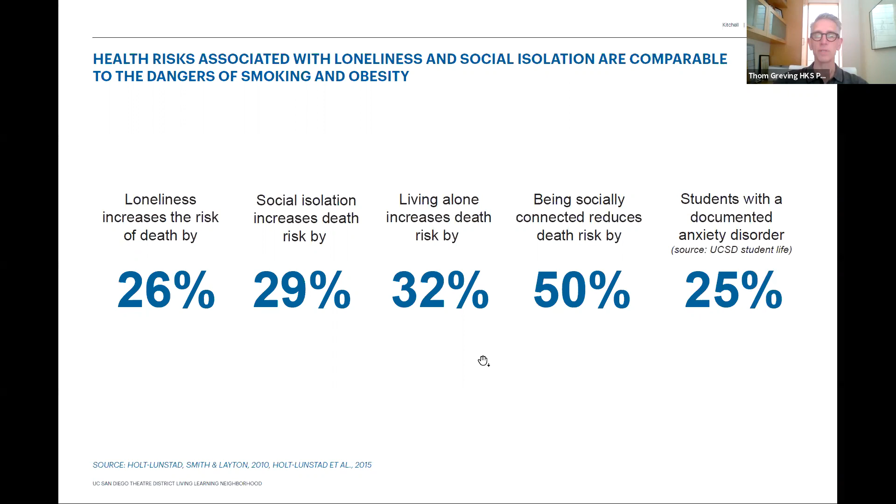So what we're seeing specifically at UC San Diego is that 25% of students arriving on campus in their freshman year have a diagnosed anxiety or mental health issue. With numbers like these, you really get the sense that it's mission critical for a project like this to succeed for the well-being of the students.

That's why we look at these institutions, because we're designing a residential neighborhood basically for 2,000 beds. Who are the people we're designing for? The university states these are really critical statistics and needs that we must address when creating neighborhoods that will be successful.

In addition to the anxiety and health disorders mentioned, many students also work. Some of them are older, going to school later in life. Some of them have children.

Some of them obviously have income issues. At UC San Diego, again these are all UC San Diego statistics, 60% of the students coming are of color, which is higher than the national average. And again, I mentioned the 25% with documented anxiety disorders. So these statistics become really important, especially when you put them into the broader notion of things that we wrestle with in society: housing insecurity, food insecurity, physical disabilities, developmental disabilities, veterans, students with children, and many underrepresented minority groups.

So we'll tell you just a little bit more about the neighborhood and then talk about the process that we're using to design it in a way that addresses some of these issues.

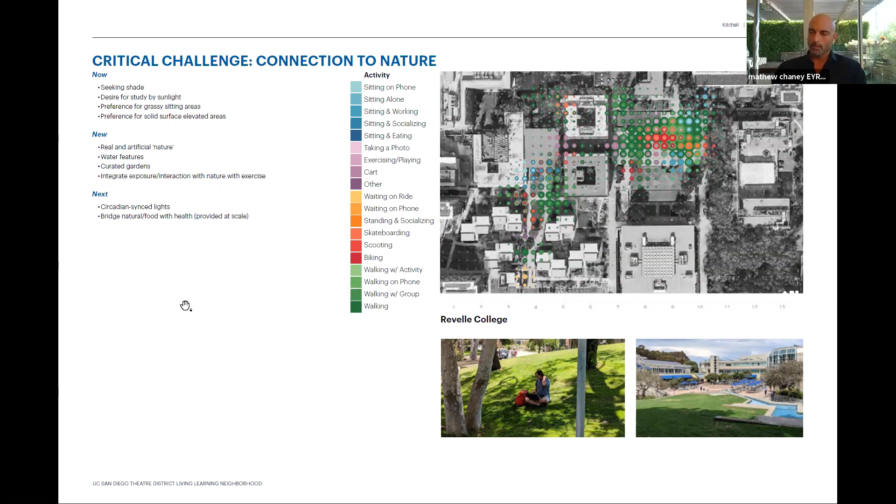We did a lot of behavior mapping for different reasons, looking at developing different types of outdoor and indoor locations, observing what was happening on campus, interviewing, and finding what was successful and what wasn't, especially as it tied to outcomes desired around connecting to nature. We did a lot of heat mapping relative to activities connecting to nature and exercising, from a health and wellness standpoint, visiting various locations on site with direct relevance to what we were doing. We'll bring up some of those items again as we talk through the design strategies.

During the design competition and continuing afterwards, we anchored the project conceptually in this notion of exponential ecology. The idea of ecology is the relationship of an organism to its environment. So for us, exponential ecology asks: what virtuous cycles can we create for the organisms, the people who will inhabit the project, that will continue to create positive outcomes throughout every aspect of their interaction with it? This became a real guiding principle - whenever we made a design decision, we made sure it reinforced other design decisions. Nothing was allowed to exist just in its own box.

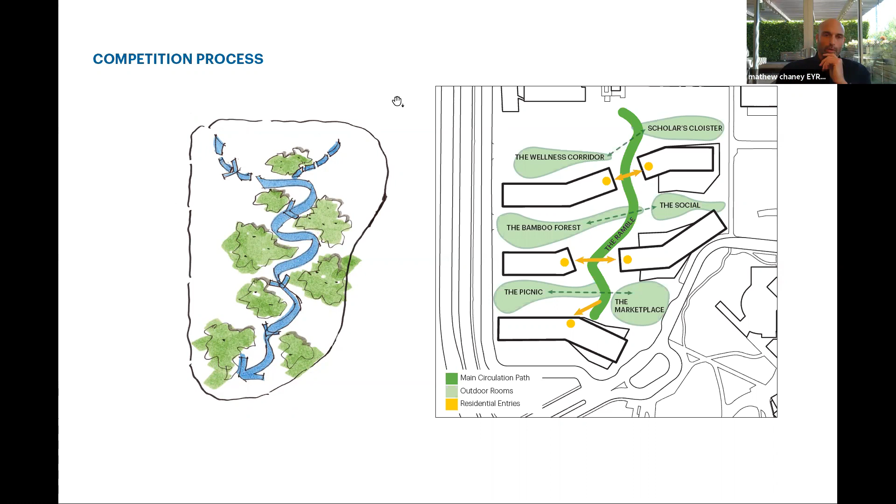As we began dealing with the site and planning how to accommodate these 2,000 beds of student housing along with other program pieces, with guiding principles of maximizing connection to nature, the first move we conceived together with our landscape architect was restoring the natural drainage ecology of the site. It's currently a giant asphalt parking lot serving the theater district and faculty and staff parking. But if we restored the normal drainage ecology, as we move stormwater across the site, how might that create an organizational idea to organize the buildings around?

You can see the diagram on the left showing the idea of the ramble, this natural storm drainage that would move through. We used that to carve the project in the north-south direction, allowing the building bars to be bifurcated by that dry creek bed type element. This also started to create a number of outdoor rooms with unique characters: the wellness corridor, the scholars cloister, the bamboo forest, the picnic, the marketplace - you'll see more about those as we go.

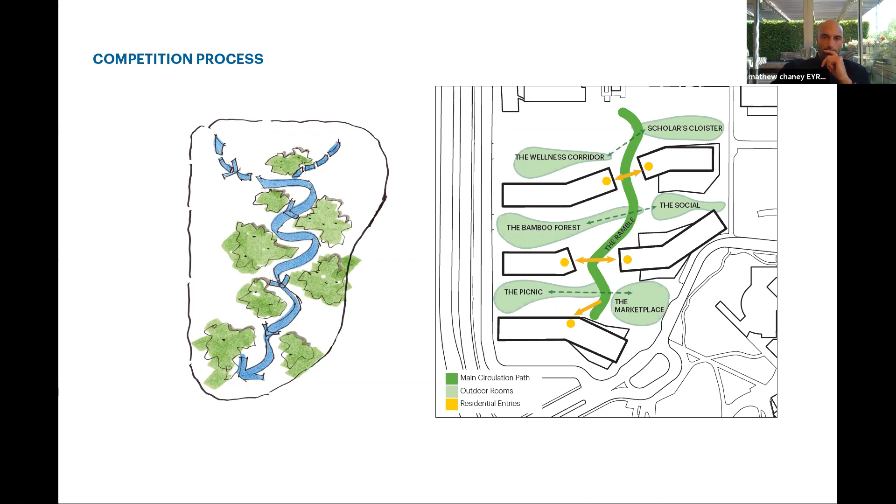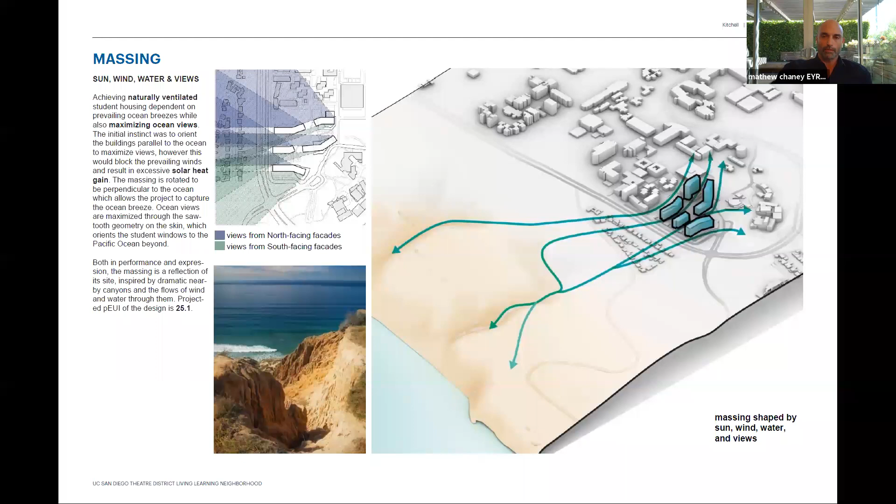Continuing this idea of allowing the environment to inform building geometry and organization, and knowing our sustainability and energy use intensity targets, we wanted to figure out how to make these buildings naturally ventilated and optimize the building geometry for that. Looking at the predominant westerly winds off the water, and the natural topography and canyons that funnel wind currents up to the site, we allowed the wind to carve the project in the east-west direction, turning the buildings and shifting orientations to capture that wind and also capture views. We did view studies and parametric tests to optimize the building massings for both natural ventilation and view opportunities from the student rooms.

So you see this more developed site plan with the building bars running east-west, putting the dominant solar orientations facing north and south. We'll talk a bit more about the facade design and the crenellations we created on the lower portions of the elevations to optimize wind flow and improve opportunities for natural ventilation. You start to see the ramble in the form of the green tree belt line running through the project, and the clear outdoor rooms with their different characters in between.

As much as this is a living and learning neighborhood, it's not just housing for the 2,000 beds, but it also is an academic cluster, which is the northeasternmost building, building 5. It also creates the Market Plaza, framed by buildings 3 and 4, which interacts intensely with the existing theater district and La Jolla Playhouse and other theater facilities down there, creating a new amenity anchor in the form of a market hall and other retail opportunities that serve as an attractor for not only students on campus, but for residents and visitors from all over San Diego and those coming to theater performances. So it really becomes this self-reinforcing living and learning neighborhood, hence the name.

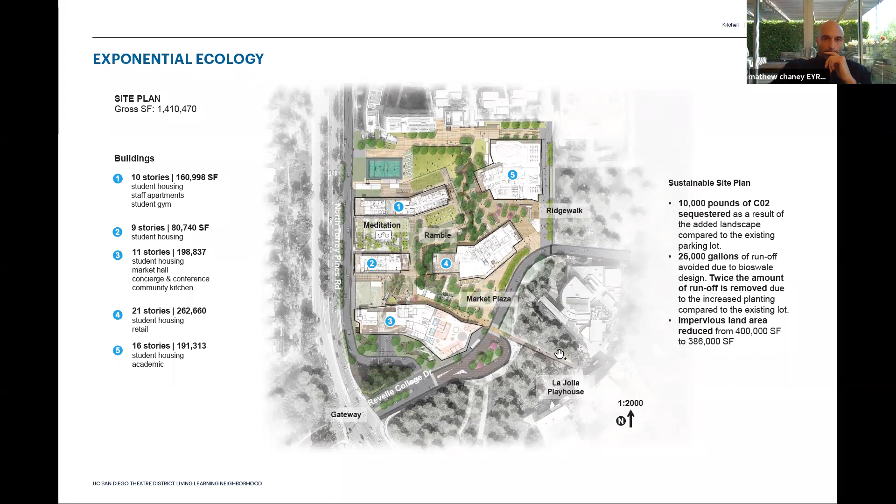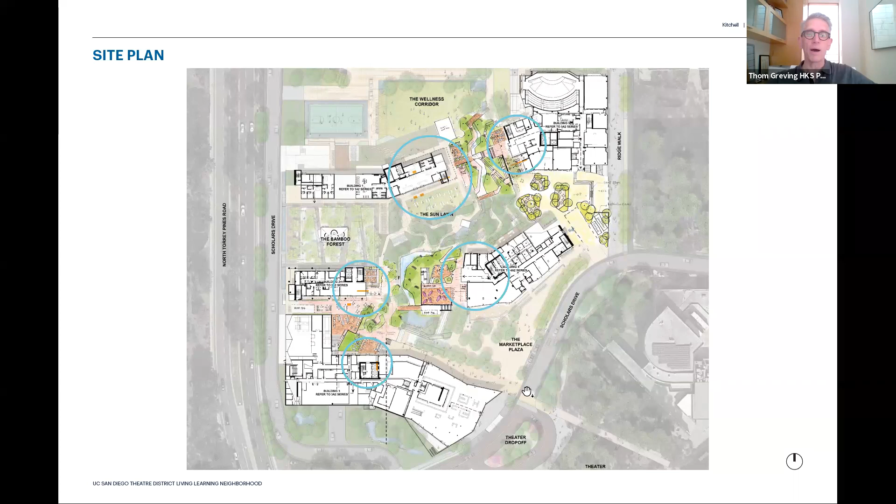If you remember the diagram of the ramble that goes through the center of the site, we decided to figure out how to continue to make that a place of community and gathering, creating individual identities for the entrances to the residences. In all cases, the residential entries enter out onto this ramble, which becomes the more private part of the site for the residential buildings, whereas the portions along Ridge Walk and the theater district become more community focused. So there's a nice opportunity to both interact and pull away as needed.

At the base of each residential building, as you can see in the diagram, the blue circles become the front doors or addresses to these residential buildings. At each location we've developed porches at the base of the buildings, caused by the overhang of the building above, that bring the scale of the building down, give each building its own individual identity, and provide opportunity for entrance into these buildings off of the ramble, which is the organizing community aspect of the site.

There's also obviously the connection to nature that occurs in every motion as people come and go from the building. Each porch ended up having its own theme—some have hammocks hanging in them, fire pits, other ways for social gatherings to occur, inviting people into that front porch, an in-between place between the full community areas of the building and the more private residential portions.

This was really fundamental to the idea of creating these nested senses of belonging. By giving each of these front porches a clear identity, it gives students living in that building an opportunity to socialize in a semi-private space that belongs to their building and clearly identifies them as part of it, while also allowing them to invite others passing by on the ramble, or friends, to come experience the unique qualities of their building. So there's an opportunity to share that way too.

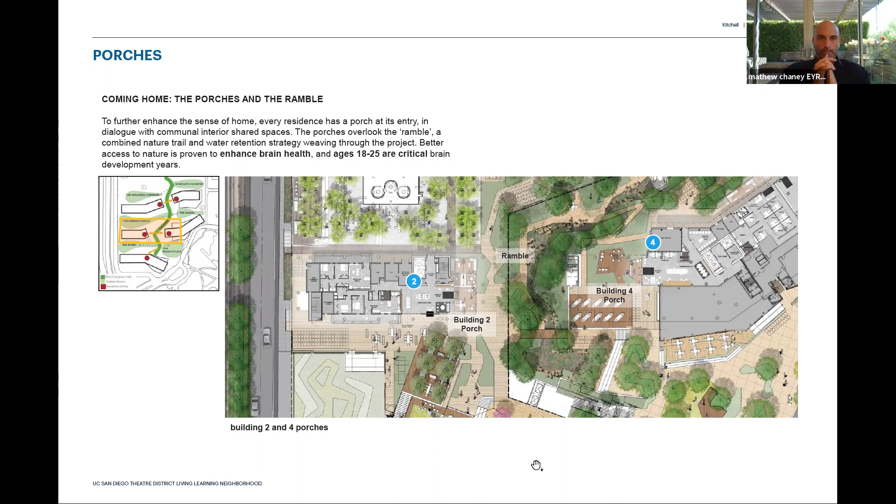So Matthew mentioned some of the outdoor rooms. In between each of these buildings, spaces of varying sizes—as the buildings move back and forth across the site—create different scales of outdoor spaces that give students different opportunities, to be either alone or in groups. The scales and character of these spaces differ because of the size of the buildings or the type of planting.

Some are more active and used for activities such as running or other outdoor activities. Some of them are actually used for more meditative uses.

I think this was one of the exciting aspects of the progressive design-build process: rather than having a fully locked-down program, it really allowed the design team to innovate, tailor the program, make suggestions to the university, and collaborate with them in its evolution to help reinforce these concepts around wellness. Once these ideas got floated—to create a meditation pavilion, a tea house, smaller more contemplative spaces that can either be experienced directly or are just part of the background that students circulate through—it gave us an opportunity to really push the conceptual aspects of the project to the highest possible level.

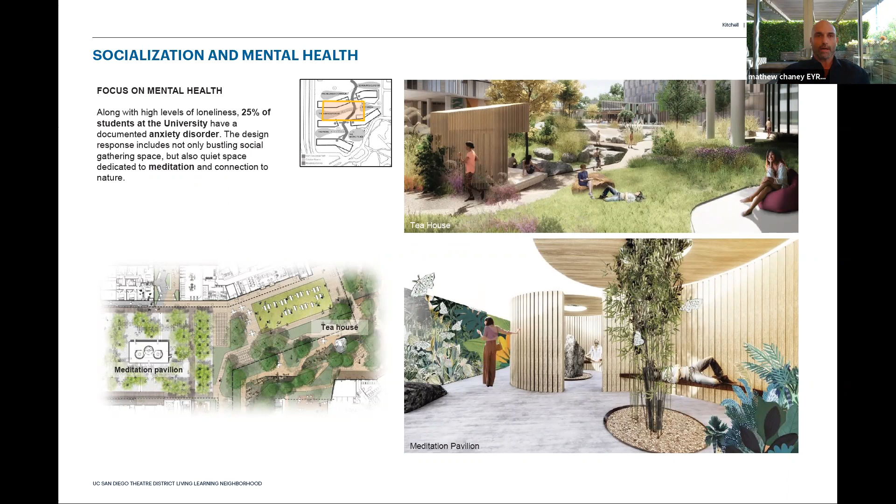So this is an image of the meditation pavilion, about 1,500 square feet, open air, unconditioned space. It's been designed to maximize the number of people who can use it simultaneously while maintaining the privacy necessary for effective meditation or contemplation, but also preserving security and making sure people have eyes on each other for safety.

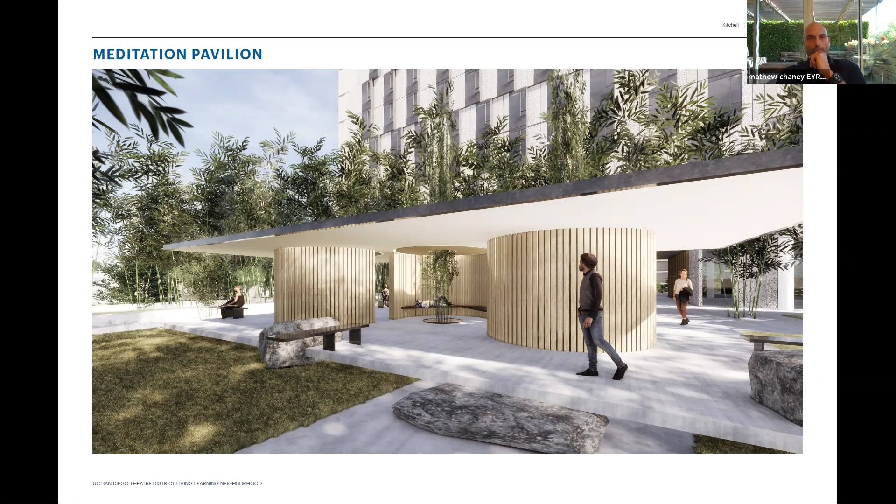All of this is landed within what we call the bamboo forest, which has a circular walking path that meanders through those bamboo elements. So even if one isn't sitting and meditating in a more conventional fashion, that contemplative strolling and walk experience is its own mindful process.

So this is an image looking down the ramble. As you can see, the portions along the walkways are the dry creek bed that accommodate the runoff from the site. Also illustrated here are three of the front porches that open onto this shared outdoor natural amenity.

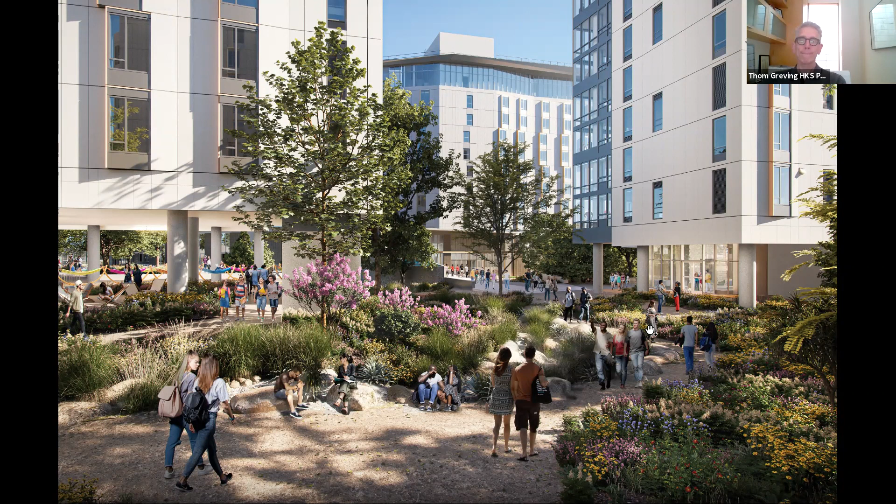Talking further about the ground plane, we were very focused on making sure that in creating connections to nature, we were creating connections that were actually comfortable, giving opportunity for different types of activities met by the human comfort needs for each activity. In more contemplative situations where people weren't moving, they needed to not be too cool or too warm. In other areas, they could be more open and in the sunlight.

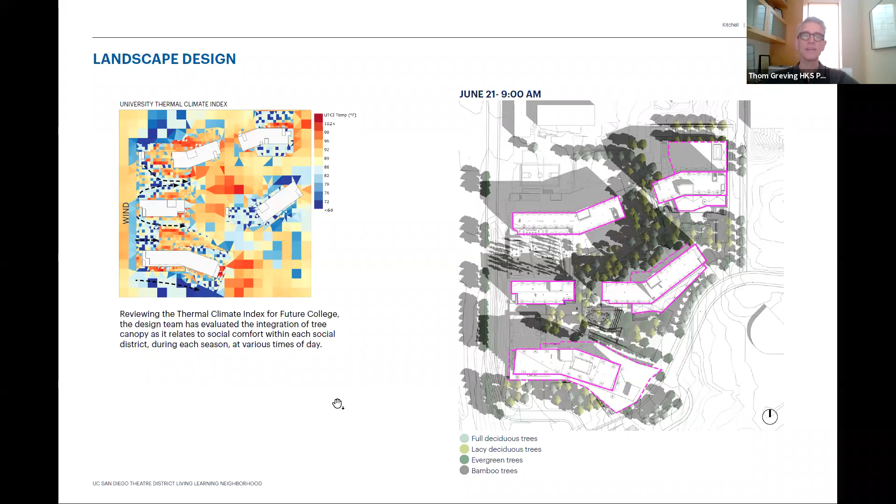So what we did is run several computational fluid dynamics studies on air movement through the site, the wind as it comes off the ocean, and then paired that with the location of plant materials on the site, studying the shade patterns of different types of materials and locations, so we could create the sorts of environments we wanted in each of these outdoor rooms.

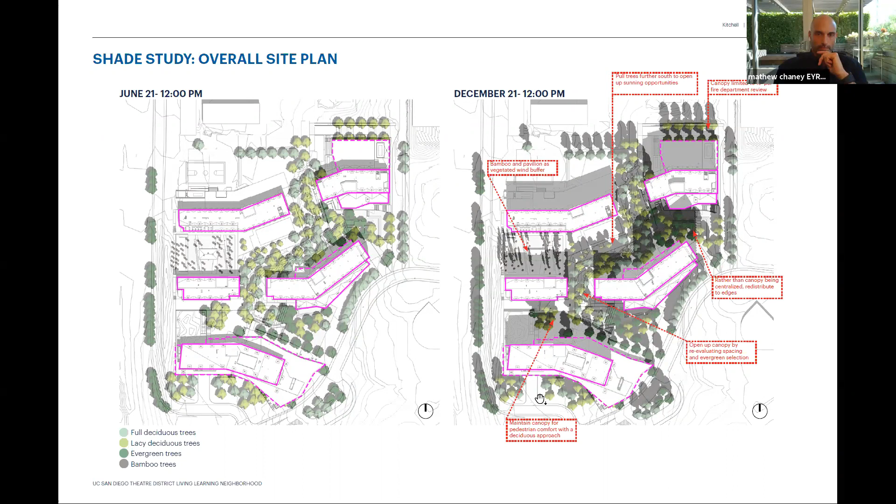These were studies that showed, these are just images from the studies we used as we looked through the project.

From an outcome standpoint, we had the opportunity after it was all done to look at what was accomplished in reducing the amount of runoff. We're happy to say that 100% of all the runoff on the site will now be handled through natural filtration processes and will not be put into the sewer system or in any way affect the runoff that goes to the ocean. That was a great outcome we all felt really good about.

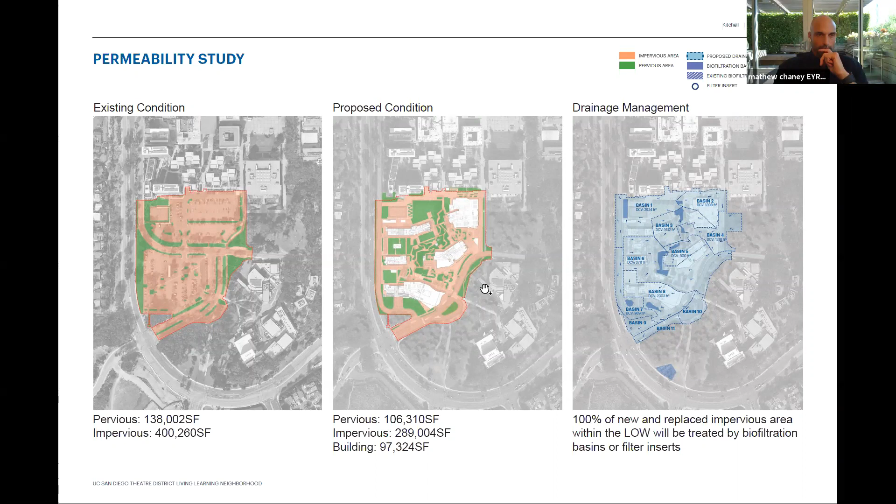So moving from the site up under the building forms and into the facade design, we'll talk a bit about how that developed.

The overall building massing, with North Torrey Pines on the western edge of the campus and our project site, and Revelle College Drive as it turns into the campus and leads to the existing theater district, it was really important to the university and the community that we reduce the building massing as much as we could on the western edge of the project site, relating to the residential neighborhoods on that side.

Some of the other moves we made were looking at the two different building skins that make up the project: the base skin, the lower skin, and then the taller tower skin. If we go to the next slide, we can expand on the logic of those two.

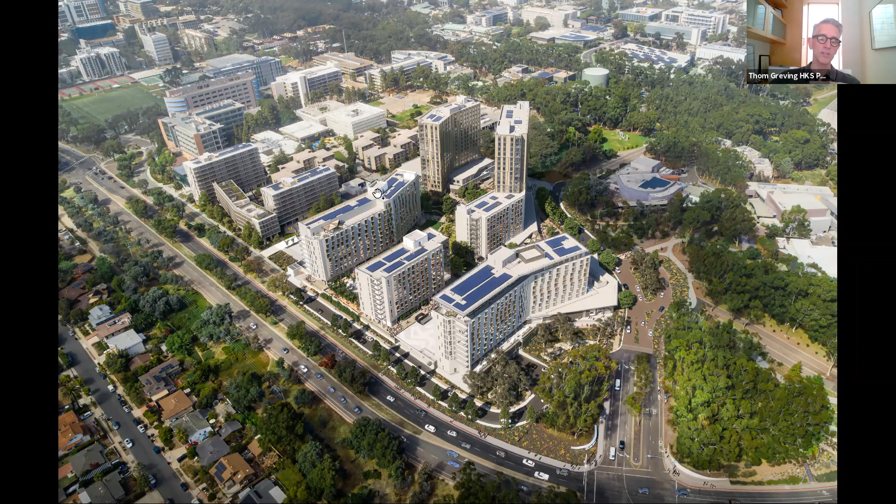And because this is one of the entrances that is most activated by folks from the community going to the theater district, and the historic grove of eucalyptus trees, this became a signature opportunity for our project to marry across. You can see how this becomes the community theater district that's integrated with the residential aspects of the project, giving students an opportunity to interact with the community in a helpful way.

We then looked at the tower skin and how that could draw upon the actual North Torrey pine tree itself, and the nature of its growth patterns. We represented a tighter graining of the skin detailing at the lower elevations, allowing it to branch up and out as occurs in the tree form, which helps reduce the perceived height and massing of the buildings and anchors it conceptually to that natural biophilic form. It's interesting to note that North Torrey pine is an endangered species that only exists in two places in the world, one being the La Jolla area. It's known for its hardy ability to resist the ocean climate and winds, and so it's very beloved in the area as a tree.

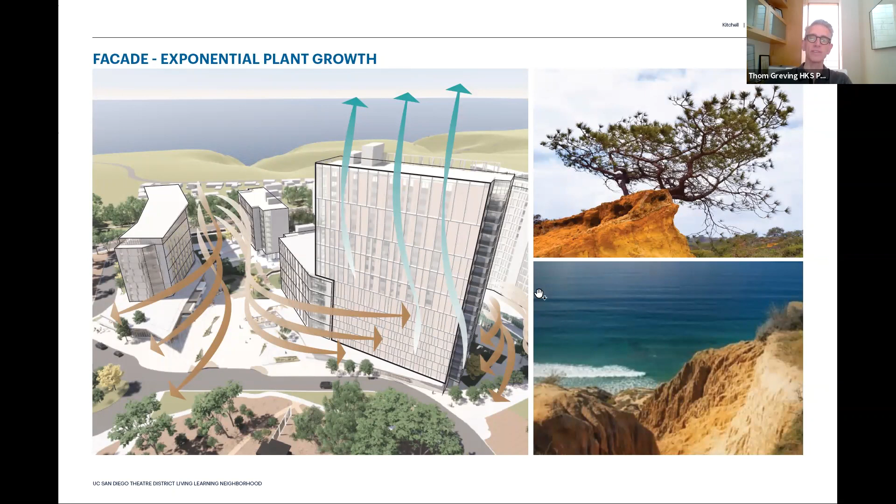So the facades were developed further, again using analytics to help drive us toward the outcomes the university was after. We wanted to take full advantage of the fact that because these are student residential buildings, they could be completely naturally ventilated if we could prove that the ventilation could occur in a way that performed, giving the appropriate human comfort metrics needed.

So the building facades, especially in the lower portions - what we learned was that if we serrated the facades, we could create turbulence as the air moved along them. It would increase the amount of airflow into the residential areas by 30%. Interestingly, from a brain health standpoint that also translates into a 1.6% improved cognitive function. We worked with our sustainability engineers and their computational fluid dynamics to figure out the proper and most effective angle of these serrations.

We married that with the opportunity to further increase the views to the ocean. The diagram shows the dynamic analytics done to understand the airflow into the spaces as a result of the serrated facade. The serrations proved effective throughout the year, and we fine-tuned them further with overhangs and side shades to make sure we were getting the full benefit from a solar performance standpoint, protecting from sun. So on one side of the buildings we have sunshades, and on the other side we don't, but they become signature features, serrated and stepped in a way that reflects the nature of the craggy cliffs mentioned earlier.

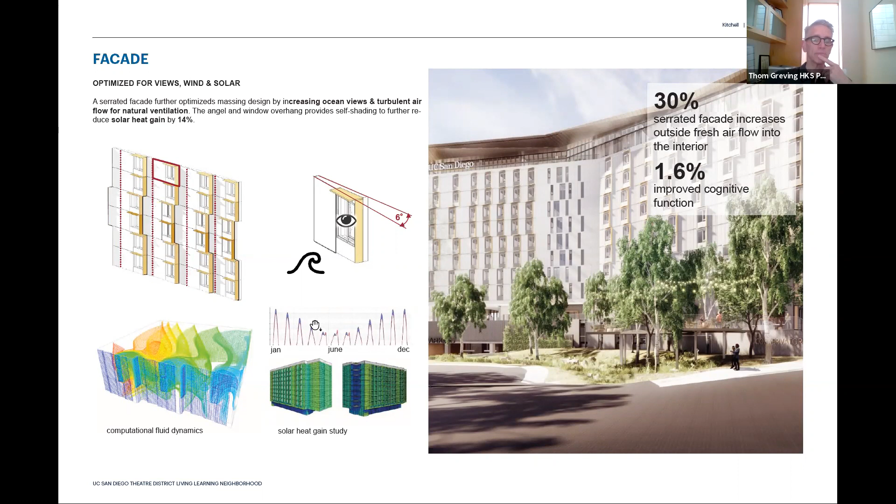From a performance standpoint, there are a lot of different issues we dealt with from a sustainability standpoint. We are, version 4, targeting LEED Gold. What we determined was that we are actually quite comfortably into gold. We talked about pushing to platinum, but decided we want to focus some of our money in ways that benefit student learning outcomes rather than shooting for LEED points. So we're trying to make our decisions in ways that keep the energy systems and energy benefits high, but also the health and wellness benefits high.

So we're balancing that out by spending some money on some of these other aspects that give students opportunities for better views, access to the exterior, daylighting, and all the other things that we've mentioned earlier.

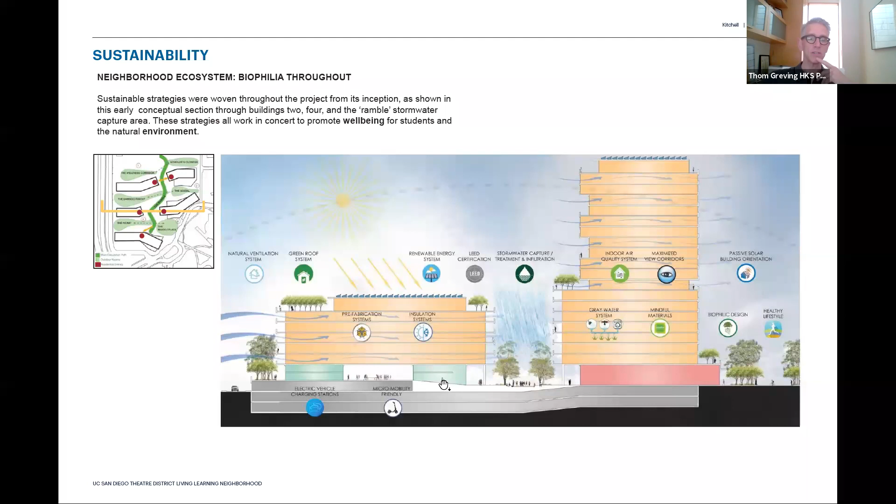And this is a quiz for those coders in the audience. We noticed when we were practicing a little bit ago that something sort of unusual was happening here. But these are some of the statistics, and I will read them to you, that have resulted from some of the analytics we've taken into account.

26,000 gallons of runoff have been avoided due to the bioswale development we have in the Ramble. The energy service efficiencies have resulted in an average energy cost savings of more than 70% at this point, and we're still driving those numbers down.

We are targeting a PEUI of 18, which is interesting, there's a story there. In the competition, we aggressively suggested that we might be able to get there. The university was very excited and told us they would hold us to it. And it looks like we're fortunately getting to the point where we're going to be able to do that.

So that gives us reductions in energy use that are well within the 2030 commitment targets we had, and well under the UC Systems target, quite a bit under what they've asked us to target from their sustainability plan. We already mentioned the serrated facades have increased the amount of outside air into the residences by 30%. Those are some of the stats that the analytics have helped us achieve.

So one of the founding concepts for the project, as with any public project at this point in time, there are obviously budget challenges, and we're really striving to maximize value for the university. Working with Kitchell, our general contractor and partner in our design-build team, part of their group is an outfit in Phoenix called Capture, a prefabrication company that does a tremendous amount of prefabrication of skin systems for buildings like this.

So from the get-go during the competition, and then throughout the schematic and design development phases, we've really been working intensely with them to optimize the opportunities to prefabricate pretty much the entirety of the building skins throughout the project. A lot of that thinking went into how do we optimize the components of the building so they can be built consistently. However, how do we give enough variety to the project so it doesn't feel prefabricated?

By coming up with this notion of the widget, and then turning that into a module with some extended wing walls, and playing those against each other as they shift back and forth on the facade, we're able to give quite a bit of geometric variety to the building while really controlling the cost of the entire assembly, optimizing the speed of construction, and minimizing the manpower required on site to erect this.

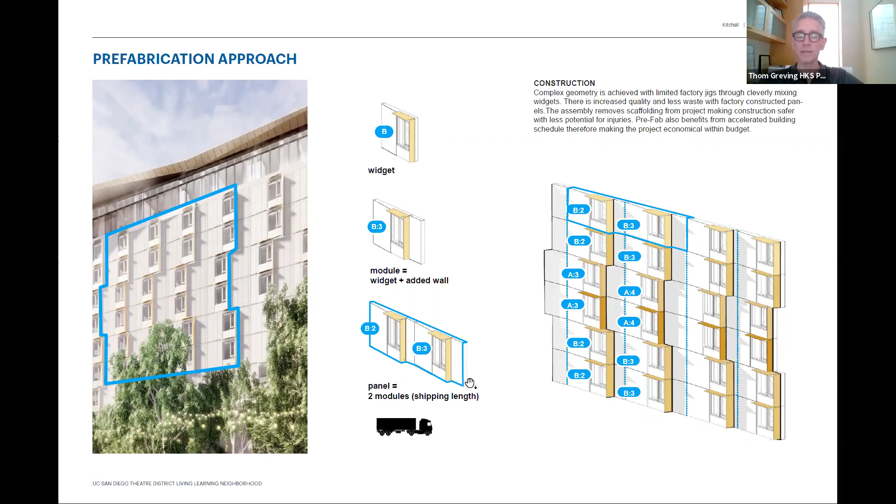One of the things we like to talk about is that early in the process, in order to find economy, but also to give benefit to students by increasing the amount of open space on the site not used for building area, we went through iterations of various unit types and unit mixes on the floors, and reduced the number of buildings on site by one. That allowed 109 square feet of open space per bed on this site, which is more than twice the amount of open space available on the next highest open space per person project on campus.

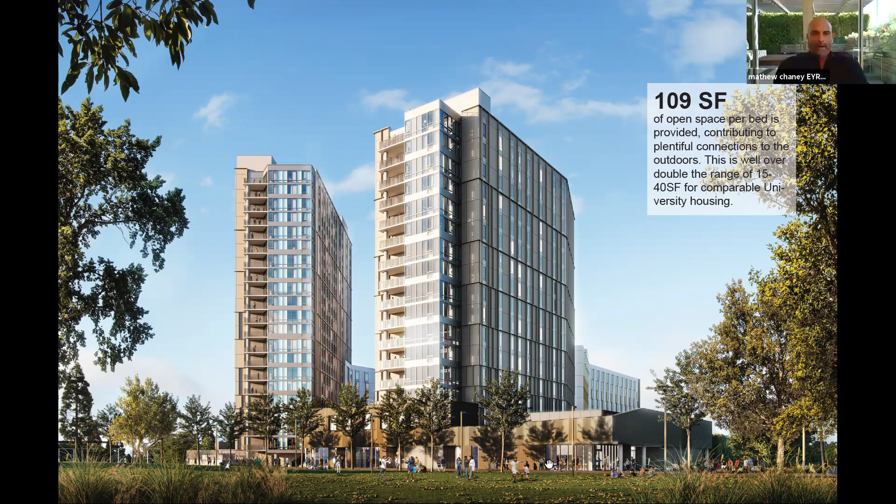So we want to move a little bit onto the interior design. We already mentioned that the interior designers are also within HKS and EYRC, so our teams have been working together, integrated not only with each other but also with the architects. Both interior and exterior design came along in development at the same time, using the same concepts and approaches to the site and users—the exponential ecology.

As we were developing the interior programs of the buildings and how they would relate to the exterior programs, creating indoor-outdoor living opportunities, we continued to strive for those ideas of exponential ecology—creating virtuous cycles and figuring out how something like physical activity could organize the interiors to create opportunities for socialization.

As an example, I'll show you on a slide in a moment how you locate the laundry rooms in such a way that it causes someone doing laundry to actually have social interaction, to engage with people who are studying. It may be less convenient than having a laundry room immediately on your floor, but it forces people into a socialization pattern.

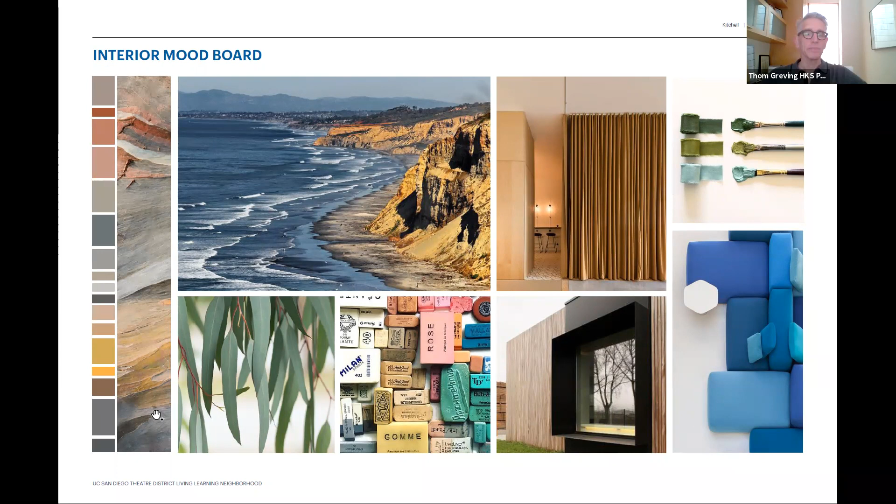And even while mentioning—Tom, I think we do want to be conscious if we're trying to end by 4:45 for Q&A. Right, that's in about 5 minutes, so—right.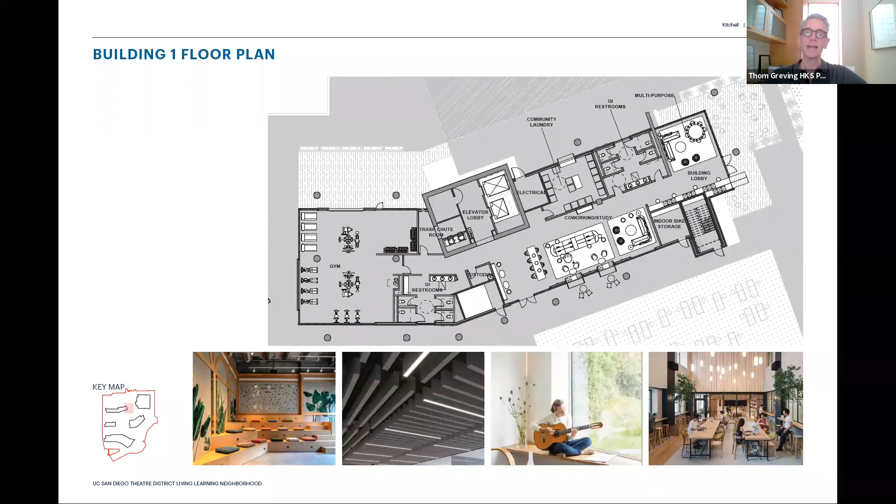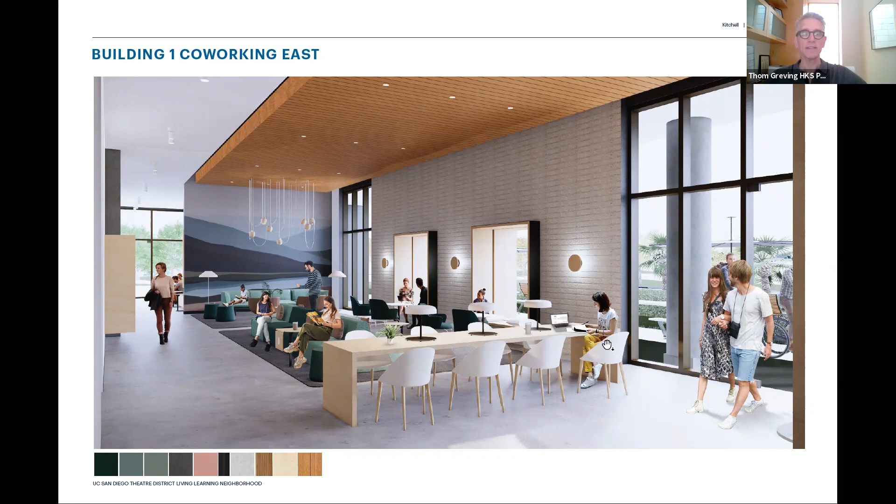We'll hustle. Keeping in mind some of the things we mentioned, all of the ground level plans are where most of the social activities have been located, with direct access to the exterior, to the front porches, creating some of those interaction possibilities we've talked about. These are some images of how those spaces are being developed, with a lot of flexibility and opportunity for different types of activity and social interactions, as we mentioned.

When you move up to the residential floors, they've also been designed in ways that create social interaction, but also give opportunities for privacy. Even the bending of the building reduces the apparent length of the corridor, and there are always views at the end of each corridor.

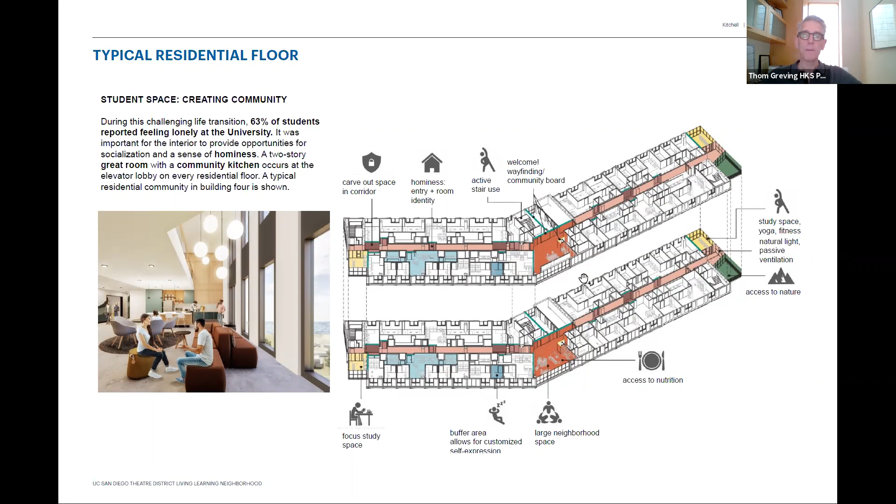In three locations on each floor, there are opportunities for social interaction. When people arrive on the elevators, they immediately get off into shared social great rooms, two-story spaces with a variety of social seating areas as well as a shared kitchen, so social activities can be enjoyed, but also people have to pass through them to get to their room, giving them another opportunity to meet new folks. These are some images of how those are starting to develop.

Do you want to go on this with Mathew? I'm waiting for the screen to catch up with the image here. I can't see which slide you're on yet. Oh man, maybe you're tracking behind what I understood. Yeah, there we go. Now I can see what you wanted me to talk about.

The other aspect to the project is not just the student housing, but also the community engagement aspect. This image shows the location of the theater district over here on the right, and how we've created the new vehicular drop-off in the middle, serving both the theater district and the Market Hall Plaza.

An important component, as Thom mentioned when looking at one of the overall aerial renderings, is the gateway aspect of how the project has a presence on North Torrey Pines that communicates not only the presence of this world-class university, but the excitement of the theater district beyond it.

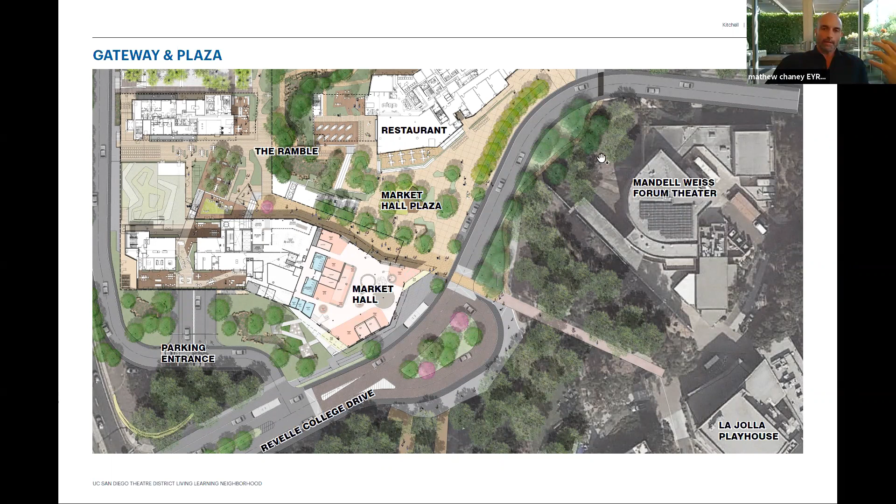In this image of the gateway, you're starting to see Revelle College Drive going up through the middle, flanked on one side by prominent UC San Diego signage, and on the other by a sculpture element we've developed called the carbon clock.

Charles Keeling discovered the Keeling curve, which tracks the level of CO2 in the atmosphere and is the foundation of climate change science. That research was done at UC San Diego. This curve plays the predictions of the Keeling curve against the commitments of UC San Diego in terms of reducing carbon emissions.

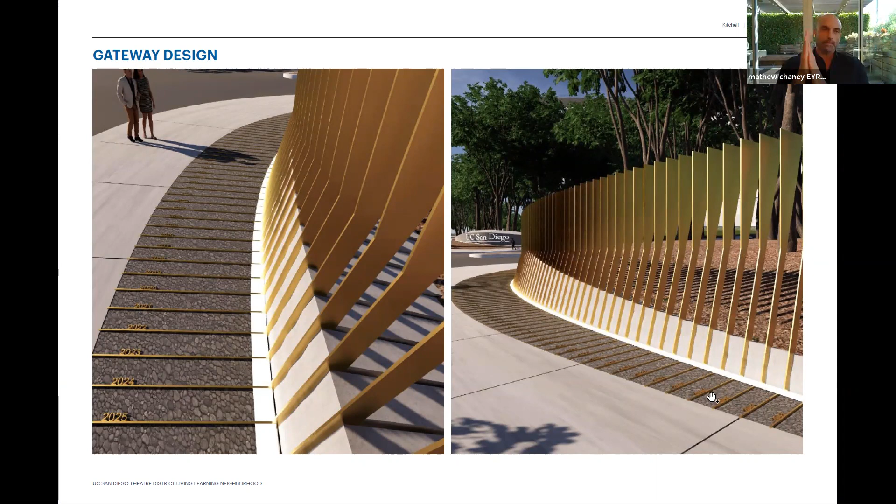One commitment is represented by the brass staves, and the other by the rising and then descending concrete element, all played against the years. It really puts into context the urgency of climate action.

Just trying to hustle along here. As we're entering the site, interaction with the community was very important, especially since they were theater patrons and patrons of the university. Parking happens underneath a good portion of the site, and we wanted to make sure the experience there was one of arrival to the project, not an afterthought.

The coming and going places from the parking structure are in what we call parking gardens. They give multi-story opportunities to leave the parking structure at vertical circulation nodes through light wells and other ways to get up into the site on multiple levels, creating these multi-level landscape elements.

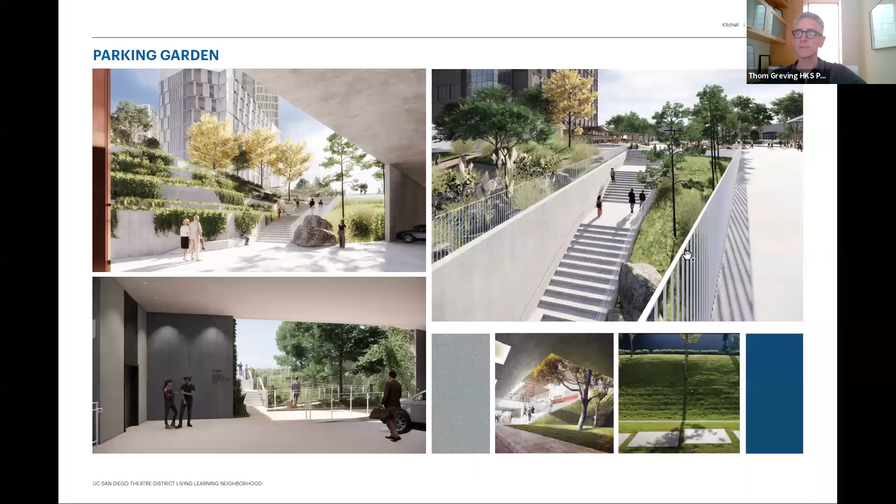The Market Hall itself is in the middle of this nexus. It's meant to be a food hall type element with a series of vendors curated from local vendors operating boutique food and beverage opportunities, making for a rich experience whether someone is coming for the first time or the tenth time, with a really different experience within that setting.

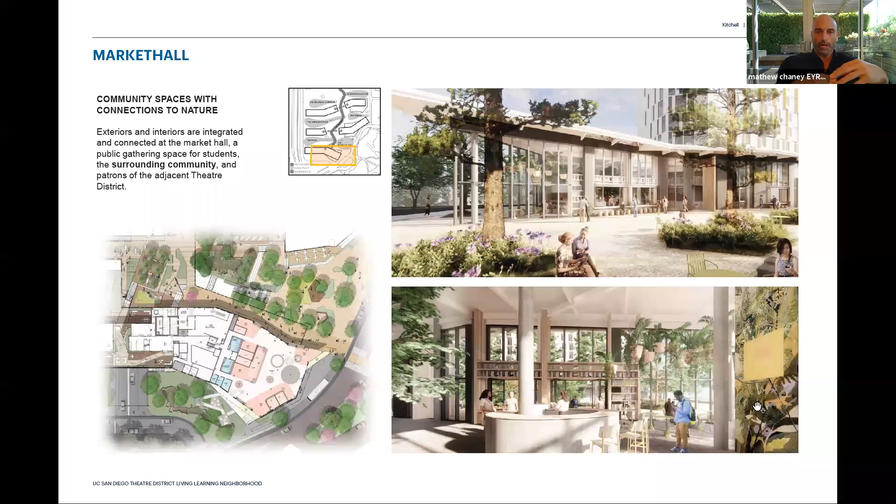You can see the materials palette and everything else really ties in with this idea of exponential ecology.

This retail plaza isn't just an area of circulation, but really becomes a community center in a way, with opportunities for programming and outdoor events, especially in this climate. It's designed to be very flexible, giving a variety of different opportunities for outdoor events and signature placemaking. The restaurants and retail are on one side, and the market hall is on the other, giving welcoming arms for this outdoor space.

So I think this really wraps up the project. Those two signature outcomes we talked about, the health and wellness aspect and the connection to community aspect, really come together in the yin and yang of the project, allowing students to socialize and connect with each other, connect with nature, and also have connection to the community fabric, helping activate a retail experience that's not just for the campus but brings in and reinforces the university's anchor to the community through the theater district and the La Jolla Playhouse.

Through outcome-driven design, we established outcomes from the beginning and used research to develop design strategies. We have a relationship with the university from the prior project, North Torrey Pines, which is now finishing construction. We're already starting research there on ideas implemented in that location, how students are panning out as they move in, and what can be learned that we can employ in further residential projects the university will be doing.